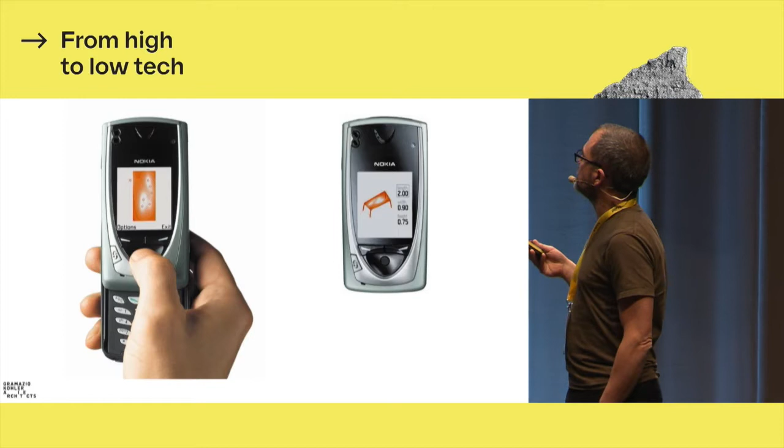Now I would like to show you a very old project. This is not research—most of the other projects will be research projects. This is a sort of a provocation we did in our office in 2002, 2003, basically building on this first smartphone. It was not called a smartphone, that was able to run apps that were not called apps. And not even Nokia knew that they could run apps—this was the tragedy of this company. But anyway, we wrote a piece of software, because this is what an app allows you: to write something and put it on another device that doesn't belong to you, that would allow a layman to design a piece of furniture.

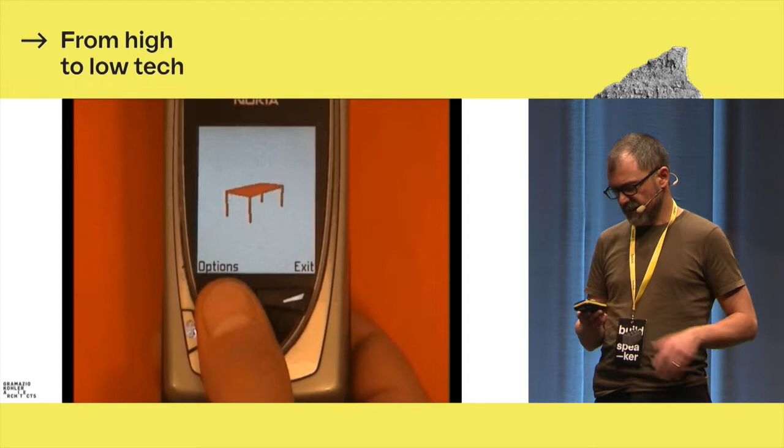I'll show you this movie—we would allow the user to manipulate a surface by placing points on it and then applying pressure, with the thumb, because it was not a touch screen, this was still a joystick. With the pressure of the thumb you'd deform the surface, and the deformation would, through a very simple geometrical operation, intersect with the other side of the plate and create a hole. By doing this, we allowed someone to create extremely complex landscapes, as being the surface of these tables, someone without any education in this context, the layman, while everything stayed compressed in very few, very simple, very minimal parameters that were even human readable.

There is clearly an authorship, there is something like a color, then it gets a bit more complex, but still, if you've seen the logic of the design, it's very straightforward. It's XY coordinates and magnitude applied to it.

With this, we are able, if we know the algorithm that created it, to generate this very complex NURB surface, and with another fully automatic step of just translating data, you can create G-code that runs this CNC router, a very simple machine that carves and mills out this very complex shape out of a very expensive piece of walnut.

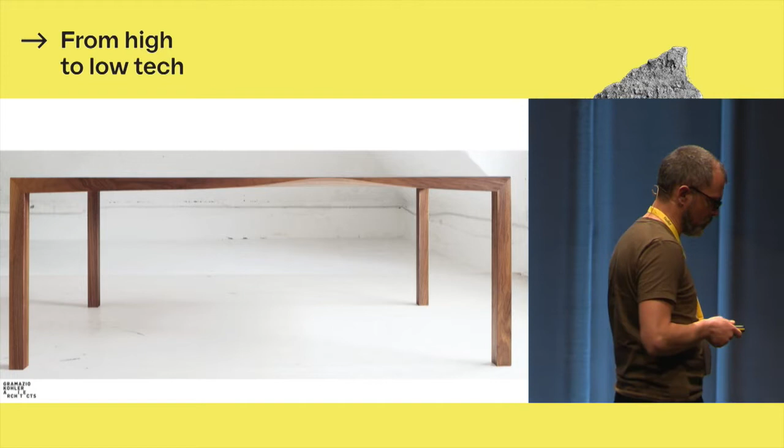And then you end up having such objects which are extremely irritating because they are elegant and at the same time they are questioning everything — the absurd table with a hole doesn't make sense, sort of, and it's even worse if somebody without any design education does it.

So basically what we were doing here was to shortcut the act of designing on a device that would not be perceived as an office machine, but just as a commodity, a phone. Until a year before, this was just a phone — you could use it to do phone calls. And here we allowed this thing to run an incredibly complex CAD software.

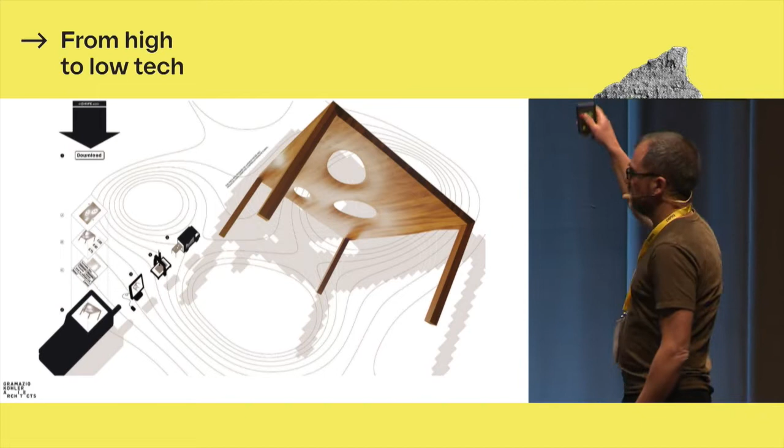And then without any human mediation, just automatically, we output on the other side a piece of incredibly high resolution material that is both beautiful and extremely problematic. And in between there is just a payment — a lot of money, because this stuff is expensive.

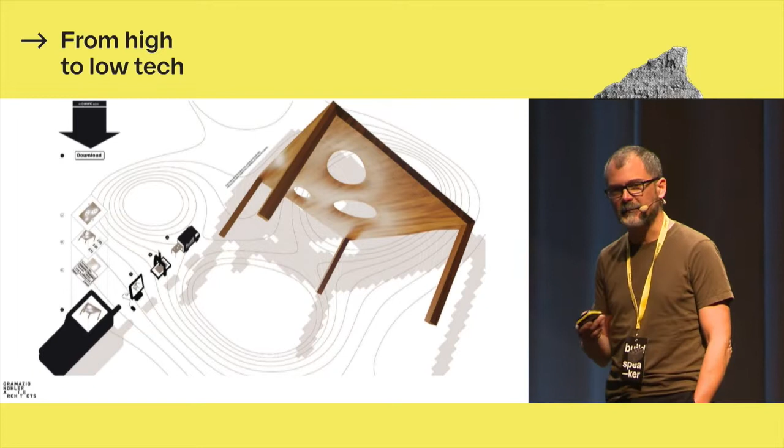We're limited to 10, you know. It was the condition in order to be able to do it, but it's like this. And we ended up with these 10 pieces bought by people who still have them and love them. But the interesting thing is the rest of them.

All these tables that were designed and never manufactured, for good reasons probably. There's just a short amount of them that I show here, and if you go through them, you see how different they are — some are more elegant than others, some would work structurally, others don't.

But most striking is how similar they are. If you close your eyes a bit, these things are almost identical.

And this questions two things. On one side, this myth of complete freedom — back then was a time of all the configurators online, from sneakers to furniture systems. And here we were radically saying, okay, you're not going to choose just the color and dimension in modules, we'll give you freedom on the form, so you can mess around with the form. So there's a critique of this fake freedom that was propagated back then.

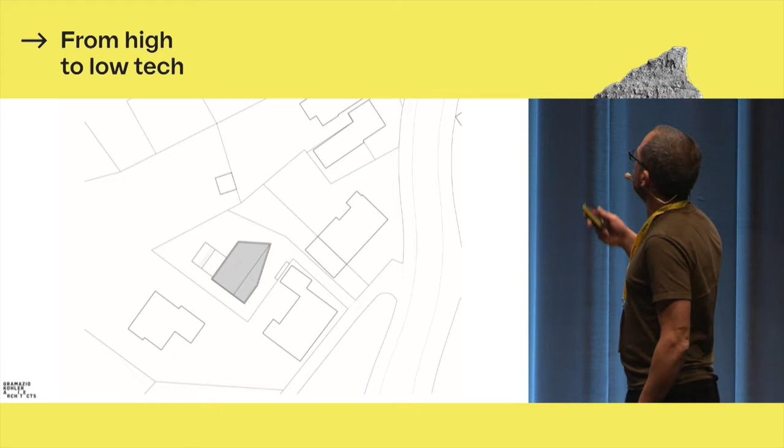It looks a bit strange, so a rectangle, it's a pretty big thing with two cuts. If I show you how they are generated, you immediately understand, just out of your own practice or thinking, how simple these things are. So it's two stories.

First one is the client builds in his own garden. Happens, and the garden is in front of the lake. So if you build a new building, you want to make sure that the old building still has a relationship to the view to the lake. And then you have an angle, and this is a number, and depending on how big the number is, the ratio between view from the old and new house plus difficulties in arranging the floor plan of the new house. So there is many implications.

The second cut is much more rational. It's just if you wanted to drive a car in the back of this house because you don't want it in the front, then you need to take away a bit of house. Here there is not much negotiation. Maybe if you have a big SUV or a small car, you could play a bit with this angle, but it's reasonable.

Okay, why I'm showing this? I'm showing this because this is a classical problem that you could very easily program. So you could write software for it, that simulates everything and does nice diagrams, many colors, whatever. Then you could show it to the client, but nobody does it, and we didn't too, just because this problem is simple enough in its consequences that you can iterate through it as architect, as human, while discussing, while sketching.

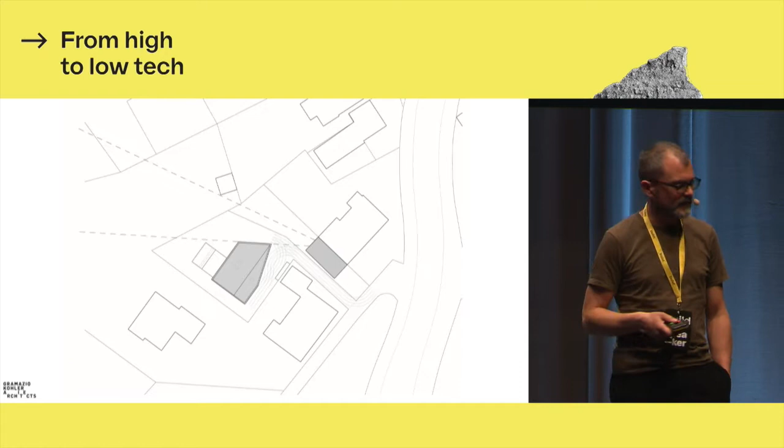And this is why you do not program. So you don't use high-tech to solve this, but it's a high-tech problem. So there is no big difference to a more complex one. I will show you the more complex problem that at first sight is also very banal.

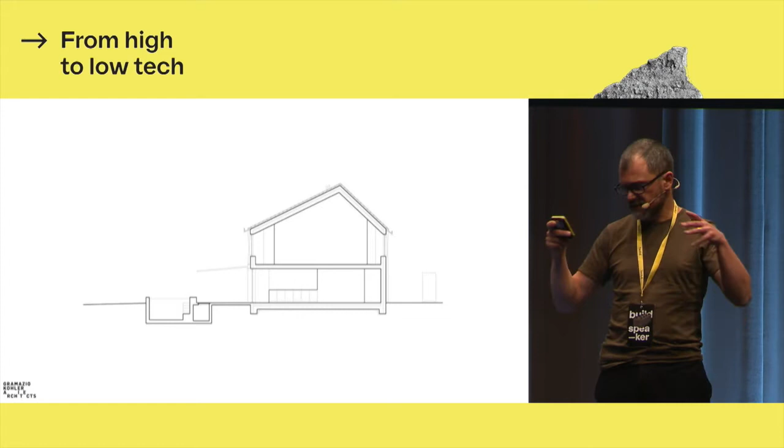Now, what you see here, these lines, this is timber slats, vertical ones, that are used to hide all this glass, because of the building code. The building code doesn't allow you any glass, and this is a trick just to pretend that this house is a timber house. It works legally. It works perfectly, because as soon as you have an angle, a minimal angle, it just closes. And if you're close to this membrane, so on the inside with the contrast and so on, it disappears.

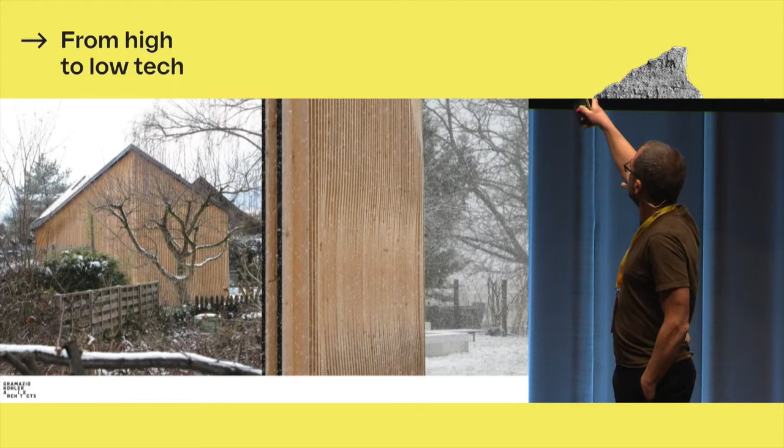And what this produces is nothing else than an engine that allows you, when designing, to create. So if you assume that you have glass, transparency, and then you put a screen in front of it, with this operation, you are able to create sort of lenses. So areas where it becomes much more transparent. You are able to direct your opening by tilting. So you could have a preferred side.

And this is the thing that allows you to do what architecture has always been about. Transparency, directing the field of view, closing up because of privacy or because of overheating or whatever. So it's sort of a modulated surface.

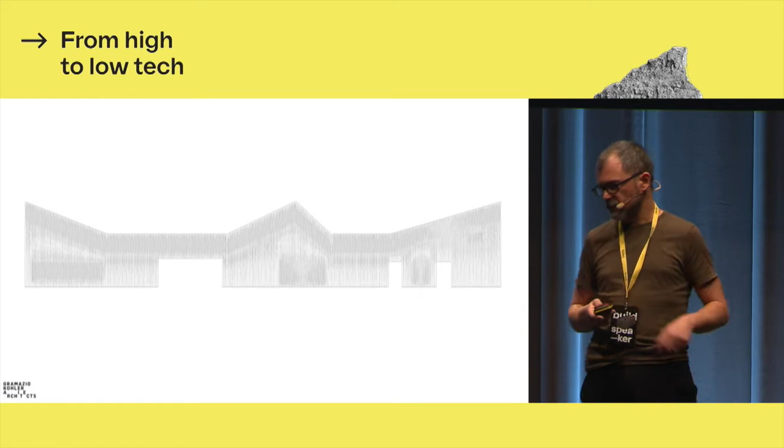But if you consider designing, by designing I mean modeling geometrically, I can do this on paper or on a computer, doesn't matter so much, 315 parts that relate to each other, you'll find that architecture is about iteration. So you do something in order to test it. You draw it or you build it in order to find out if it's good and where you should eventually move. Then it is not going to work. But if you parameterize it, and this is programming, if you say this simple logic is formalized in a piece of code, that allows you to instrumentalize a computer that can go through these 315 parts—for a computer, even a smartphone nowadays, this is nothing—then you are able to control this whole thing.

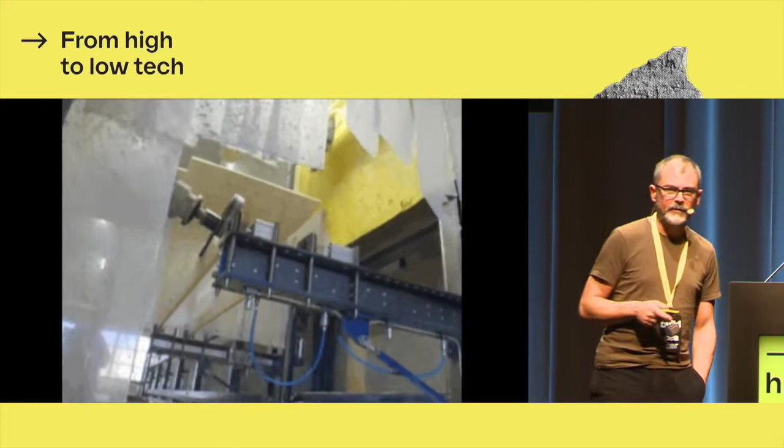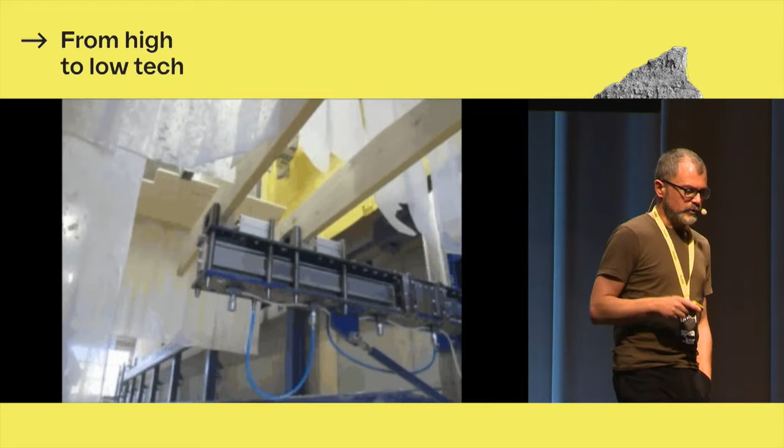So the same thing that before was a simple iteration between one number and a consequence is also feasible here. And then the second thing: once you've done this step using high tech, so you don't draw it, you program it, then you have automatically produced data. And if you have produced data, in analogy to the mill and the table I've shown you before, you can use a machine like this one to produce these 300 very different, very specific parts automatically.

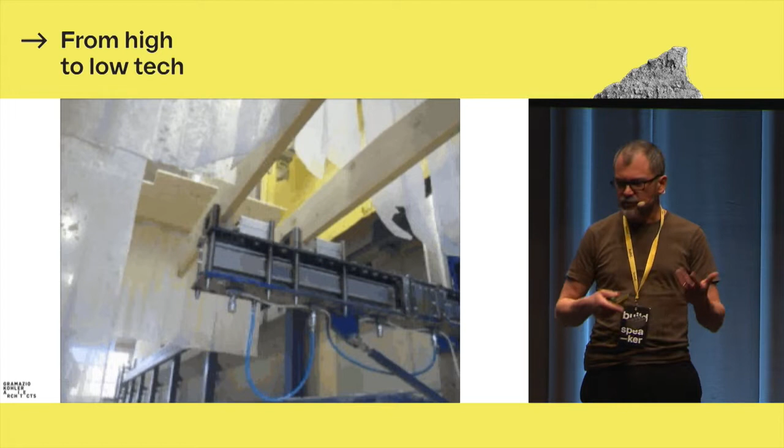This is very important, because if you had 315 drawings and went to a contractor, you'd get a high price, probably, because it's not what they do every day. The logistics behind it are a bit messy. But this machine is one the contractor would use anyway for the 315 parts, even if you don't ask for it. As soon as you say, I want them flat, flush, and 22.5 centimeters, and he has 25, he puts each part on this machine, runs it through, tilts it, turns it 180 degrees, and runs it back. So by doing this, we didn't add one euro to the project. We were just adding data.

Okay, and this is the result: sort of a minimal intervention on these physical parts that often is not even visible. Sometimes it becomes dramatic in its consequences, depending on where you are.

And this is an important part. It comes for free, but it doesn't come for free just by chance. It comes for free if you are designing the whole process. And then many questions become relevant: did you first find the machine and then derive the design from the operation the machine is good at? Or did you start with the design and then were very lucky because this machine matches? These are tricky things.

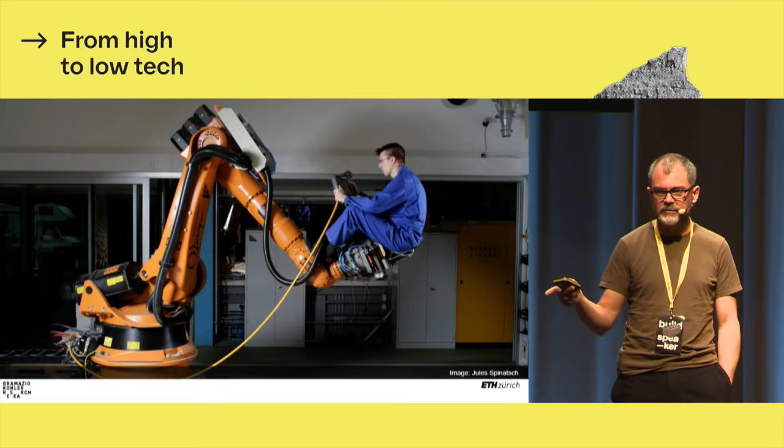Because this is high tech, although it's not so much high tech. We started with this in 2005, and this machine was already a commodity, a cheap mass product compared to the two machines you've seen before, which are more expensive than this robot, because this one has been produced in millions of pieces. This, by the way, is an artist's image.

It's not the way you actually use a robot, but we use it because it nicely shows that, at least for us, this machine always engages a dialogue with us at different levels - as craftsman, as designer, as client. But the machine is not autonomous - that doesn't make sense. So there is this mutual dependency. This is also a nice and important thing.

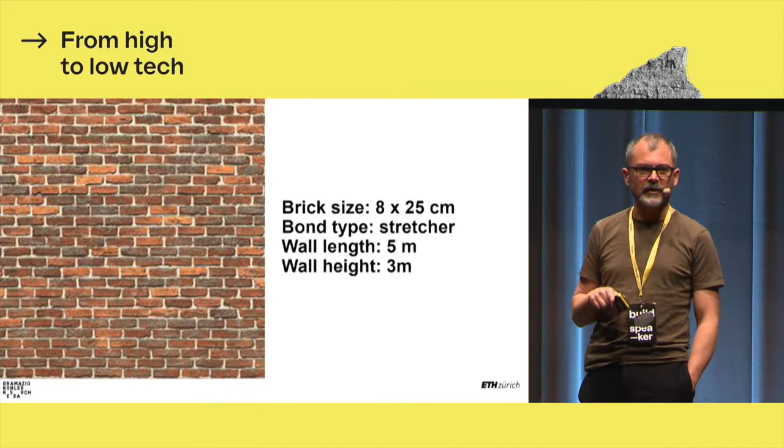Now if we work with a computer and a robot, with technology, it doesn't make sense to explain to a robot what a stretcher bond is. That would be a strange detour. But we write it like this because this is the way you describe it. I'm using this example because it's so banal, so simple. There's nothing simpler than this. Two loops nested one into each other just produces this wall.

If you do more complex three-dimensional things, it gets way more complex. But in order to talk about it, this is a good example. So this produces exactly this, and it's uninteresting so far, because it doesn't produce anything new.

Now, where we got excited—this was a few months after getting this robot—we said, okay, let's start with bricks. We don't have time to reinvent processes now. Let's just check what we could do with this machine that's able to automatically place parts in space, with the oldest standardized part of architecture. Here you see a student checking what else could happen in such a bond. He tries to rotate these parts, to understand the tolerances, how much he can turn them, rotate them, until they fall down, cantilevering and so on.

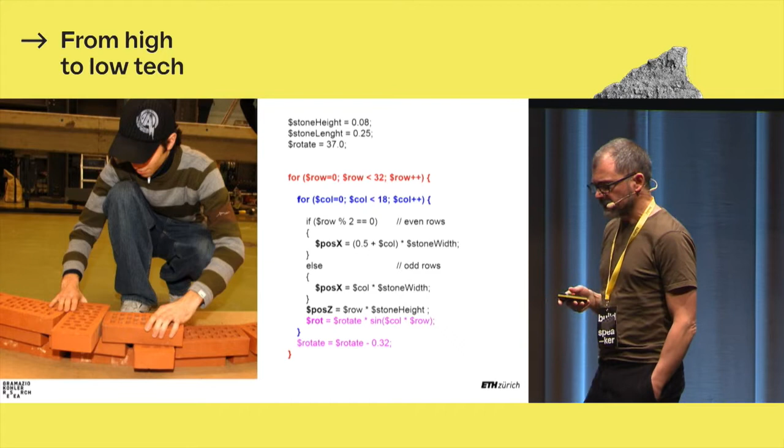Then he decides to add these two lines of code at the very end. So only the pink has changed here—this is exactly the same. From the variable names you understand it's about rotations. It's not important to understand exactly what he does. The only important thing is that now he modifies the position of each single brick, so there's no rule anymore from this point on.

So the code is here—this I can read, I can change. This is operational, and this is just data. It's a mess, you know—but now this is a mess for us humans, because this I cannot give anybody. I cannot draw it, I cannot give a list.

This beauty of the stretcher bond as a cultural convention allows us to make sure we get what we want. Here it fails, but it doesn't fail with a machine—on the contrary, the machine expects this, and would have huge problems with any other notation. This allows us to directly connect the power of design—the conceptual level, the operational level that includes high tech when you program. This is a new part of our profession, a new skill, directly with a physical output taken care of by a machine that doesn't care if this wall is regular or not.

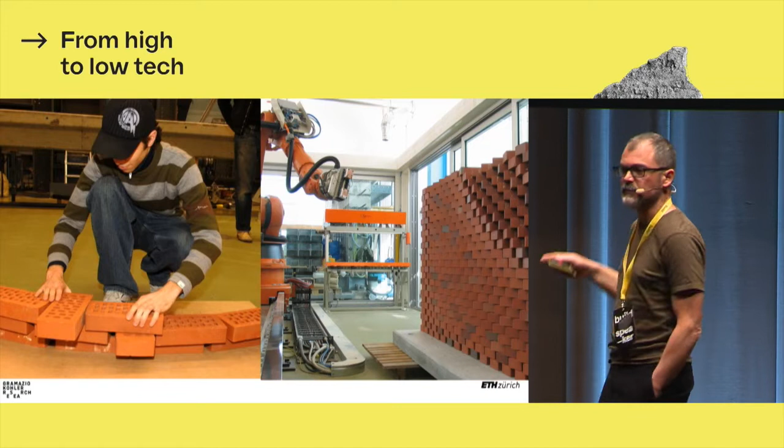We're again at the previous example. It comes at exactly the same cost—as soon as this process is set up, there's no cost difference. This is fascinating, because suddenly you end up with something like this, and this is where, for us, this term of digital materiality started to make sense. I think that is extremely physical.

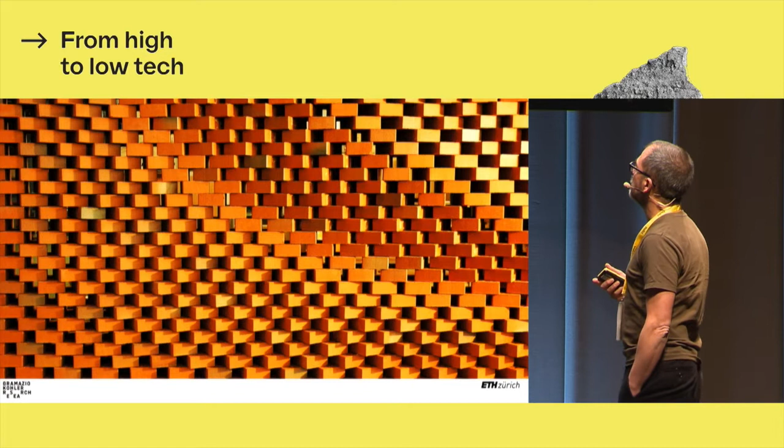It's also scaleless to a certain extent. It's about material, but also about relationships of volume, voids, light, and it's completely malleable at the same time. It's not a result of something super expensive, super complex, super luxury—it's the simple thing you can get if you engage with such thinking and such a design process.

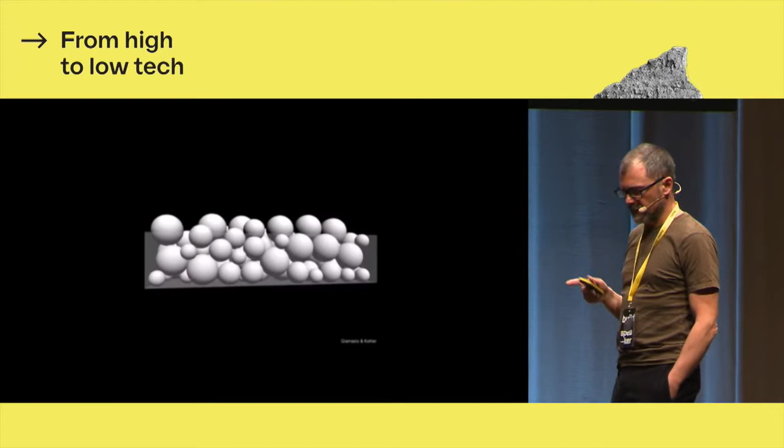Now I'd like to go through two real-world applications. This is a winery—I'll show it because we have another winery I'll show later, and I like to show the relationship between those two things. This is the way we designed it.

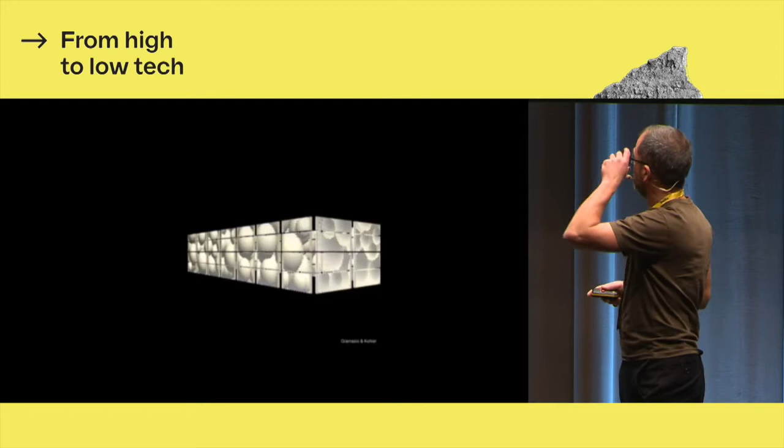I can't explain it in detail now, but if you have the freedom to freely place 10, 20, 30, 50, 100,000 single parts, the question of how you turn them becomes pretty relevant. So you need a strategy to inform it, to produce the data. This was pretty banal, straightforward. We filled the building—which, by the way, was given to us, an objet trouvé, not designed by us—with spheres, did the dense packing, looked at it, transferred the color information to the rotation, and ended up with this. Then we implemented the process. Pretty easy, you just need a gripper.

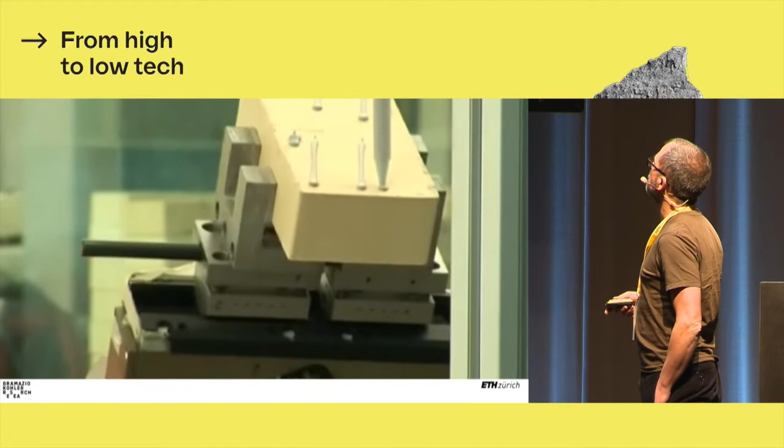And everything else is pure information. So knowing how the glue has to be applied, and then the final positioning is super simple for the robot. It's all automatically derived from this terrible large amount of rotation and numbers that give us a headache, but not the machine.

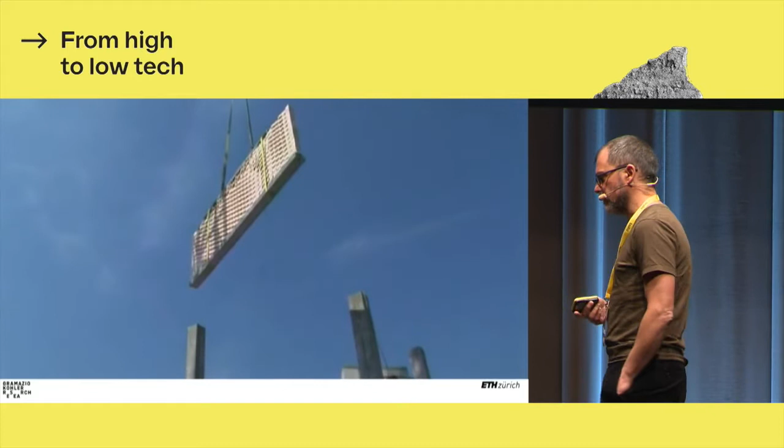And then we started to think about this relationship between the size of the parts and, in our case, the robot. Here you see a few images. You see what it does then to architecture.

Always keep in mind that there is no difference to any other pattern, or even if you would do it completely flat, regular, a pure stretcher, you would use the same amount of bricks, the same amount of time, the same amount of energy, and so on and so forth.

The second one is a bit more complex, also because it scales up the number of parts, and here the number of parts become custom, although in a very controlled manner. This is 50,000 parts, timber parts, slats, 5 by 10 centimeters, so a pretty fragile thing, aggregated to one 2,300 square meter roof, structural roof.

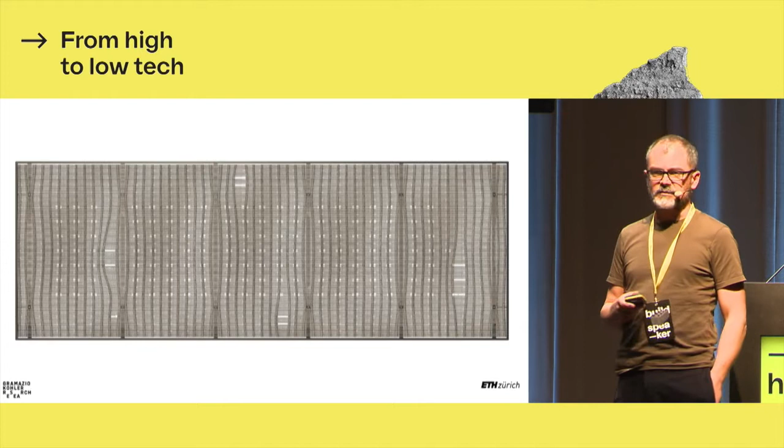And it's not only 50,000 parts, it's also almost 1 million nails. So it's a pretty brutal, simple way to aggregate this thing.

And what you see here, why this drawing is interesting and important, and by the way, it's probably the only drawing that exists from this project, because drawings were useless. There was only data. But what it expressed very nicely is that these parts, the simple part, at this resolution, may turn the whole thing into almost a fabric, becomes textile.

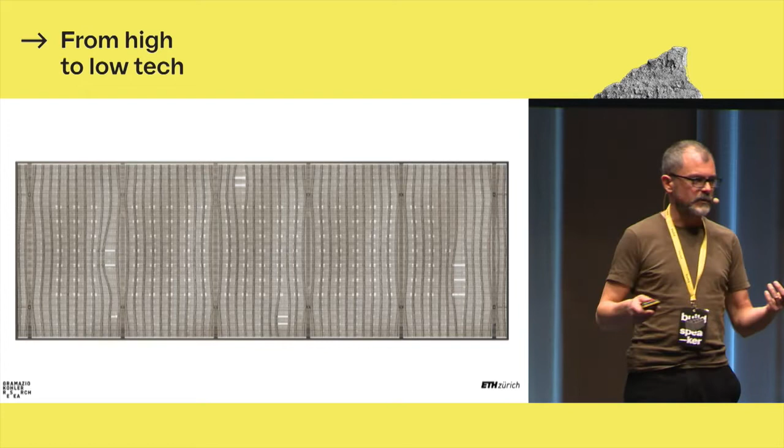As long as there is a computational relationship between these parts, then you can, for example, there we had, it's always the same thing. At the very end, you find out that you need ducts, you know. You had them in the project for the staircase for smoke evacuation. You had them in the project, but they were always too small. Then at a certain point, the engineers say, oh, this needs to be 3 times bigger, and then it doesn't fit anymore. And then normally you would just cut out, you know, and do some fixes.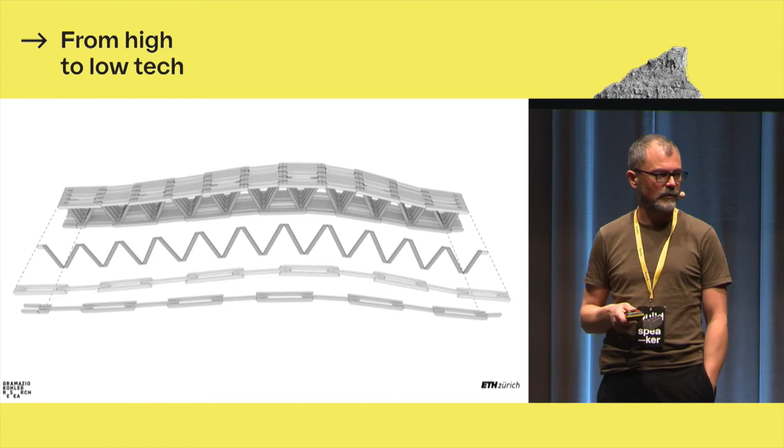And here we just stretch, because as long as it's not built, it's completely malleable. We just stretch the thing. Because the system behind is extremely straightforward. It's just this big, long 15-meter trusses, and the only thing that changes is the relative length and the angle on the end cuts of all these subcomponents.

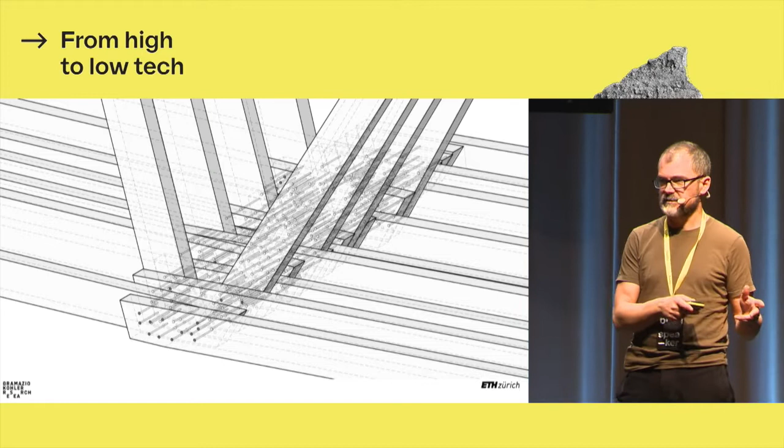And then we zoom in another step, then we have 1 million nails. Again, they all have their own position because there are so many dependencies. So I think you can forget about designing and standardizing. There is not one that fits it all here. But it doesn't matter, because as long as it's computationally described, then you don't care.

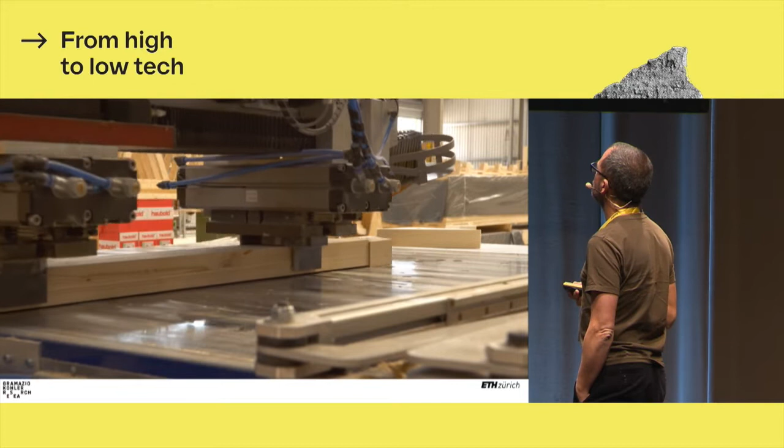Here you see again how simple then the fabrication of such a thing is in reality. This is the brick we had before, and now we just cut its ends, so we can have a bit longer and a bit shorter bricks.

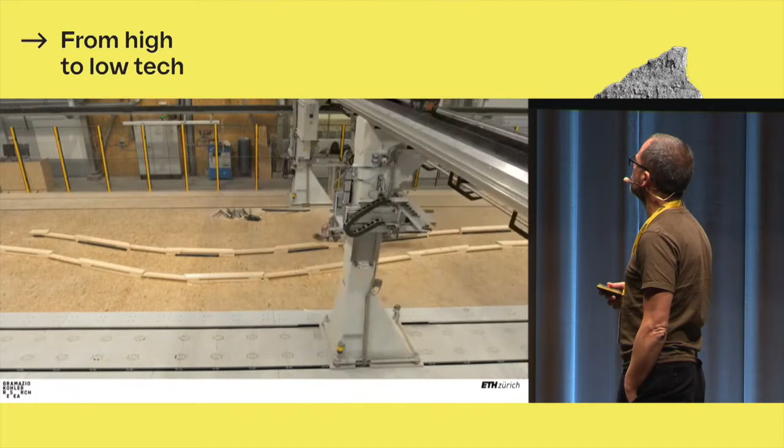This goes onto the table. This is now a very large table, and this huge robot places the parts, and after a single part has been placed, a first nail is shot in order to keep it in place. Then it turns the aggregate, the end effector, and brings the rest.

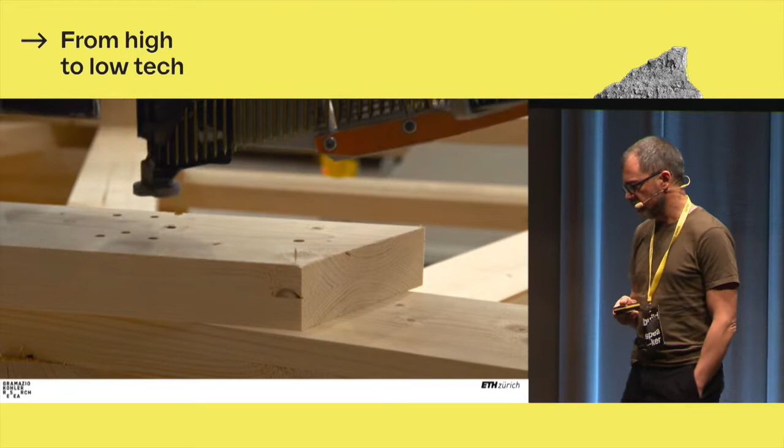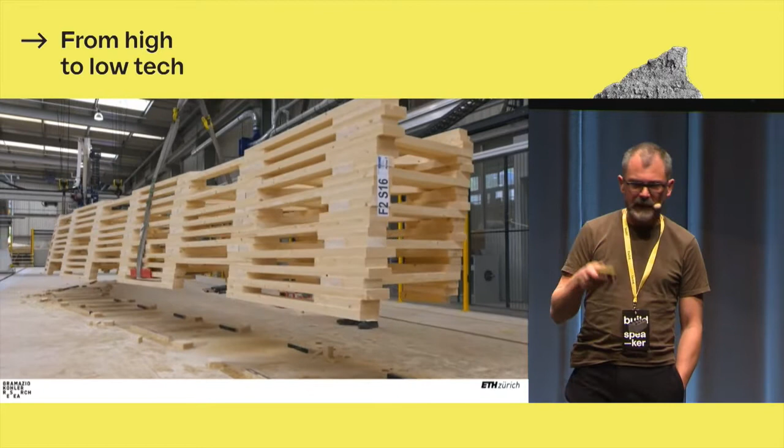And these huge parts, custom parts, are then installed, so completed with all the subsystems: sprinkler, electricity, light, and so on and so forth. This is the classical processes of prefabrication, all done in the shop, and then they are trucked

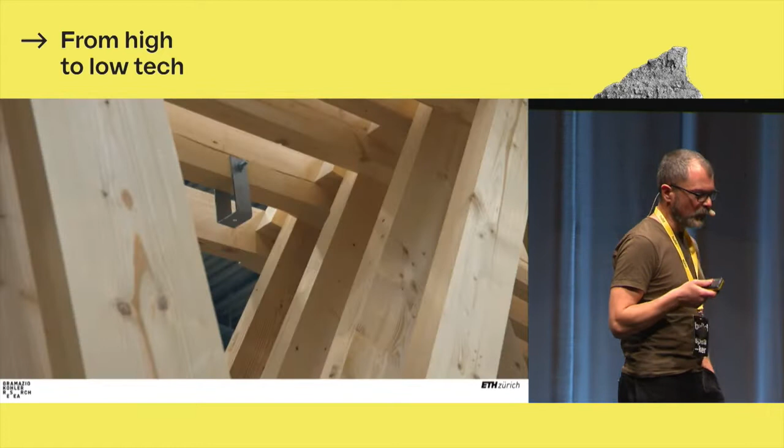onto the building site and installed there. And what is impressive and important is that you start from 50,000 parts, and without any human intervention, you boil them down to 168 parts. This is one part. There are 168 of them, and they just get picked up, craned into position, and fixed with 5 screws. And this is not exaggerated, because they have just their place, they fit.

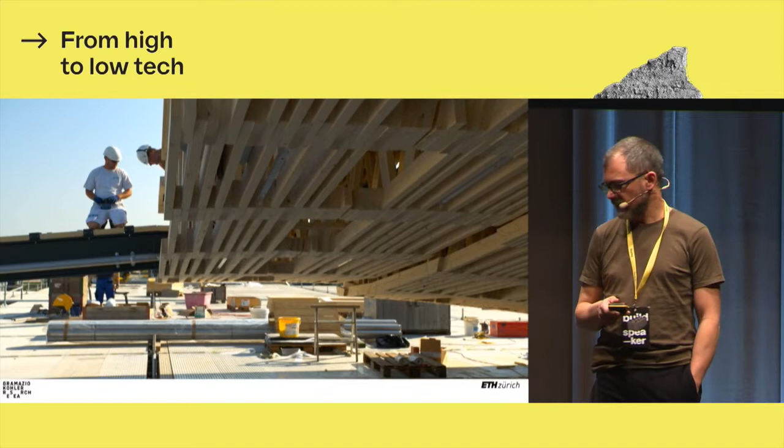This is nice because it's our institute building. We were actually allowed to integrate research in a project the university would have built anyway, which is a very good thing. Now I wanted to take a step forward and introduce 2 projects that are pretty recent

that work with augmented reality. And we started with one timber project, where again we have parts, and these parts are all identical. The project is about a wall, an acoustically diffusive wall. I won't explain how this works, it's complicated, not the point here. But the building system is what you actually see here.

So you have parts, and these parts need to find their position. Now, this is exactly what 10 years ago we used a robot for, because it's just about, this is always the same element rotated. You have 4 possible positions, and then you have a Z translation. This is exactly the data that back then only the robot was able to manage, but with augmented reality, we

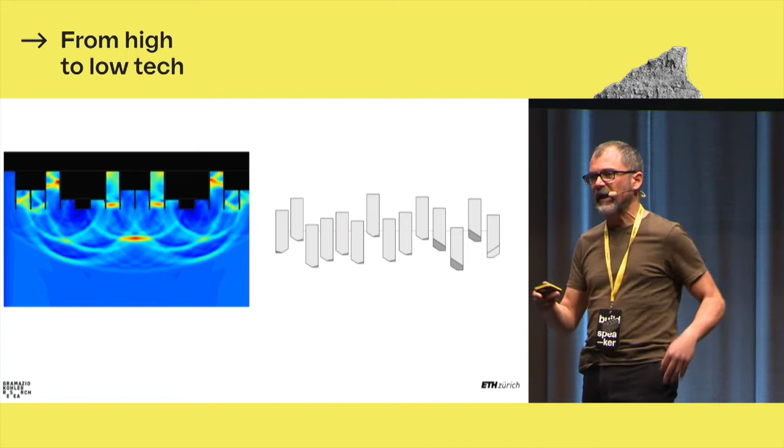can make this thing extremely more flexible, because now just these very simple relative operations of parts, prefabricated in large amounts, can be very quickly and very easily placed at their final position in space relative to each other. So here we can transition from this just abstract bunch of data to this very precise and organized wall with these simple tools.

They are basically, we'll see it in the next project, basically a camera and a display that tells the person where he is in space. A few images of this thing.

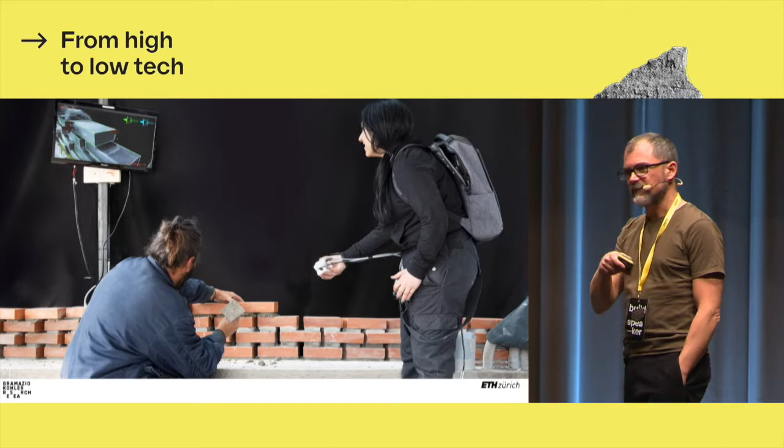And now this is a second winery, and this is a very funny story because we were approached 3 years ago, before the pandemic, by people that were also producing wine, and they were also like the first one, Gantenbein. There were so many similarities. These were people that came from another profession, decided to invest in a winery, God knows why, and so on. And they knew that we did the last one, and so they asked us, could you do the same thing for us in Greece?

And we pretty instinctively said, no, we will not, because there is no point in doing it. We have done it, and it was after the financial crisis. It felt really odd to bring robotically fabricated brick elements down to Greece in order to install them there. Why? But they came back to us a few times and obliged us to think, okay, what is the problem? What is the difference? And then we decided, okay, we do it, we redo the project, but we radically change

the premises. So we do it with local labor, with local material, with augmented reality. And here you see how this worked. And it is very nice because, while the first winery was reduced to the max because we weren't able to use mortar, we had to use glue, and this was a bit of an ugly thing.

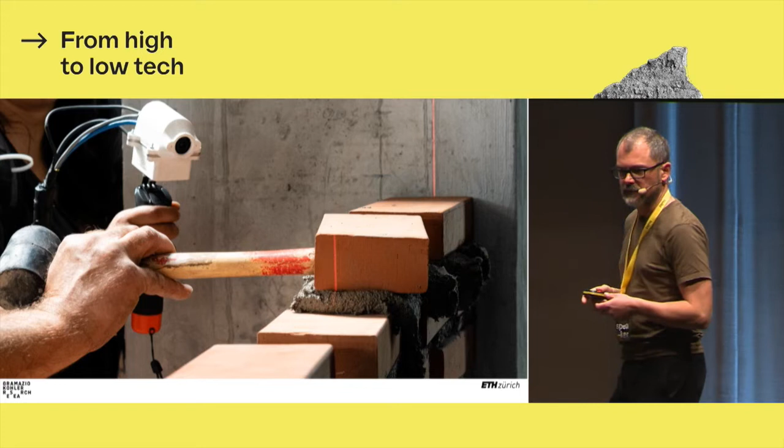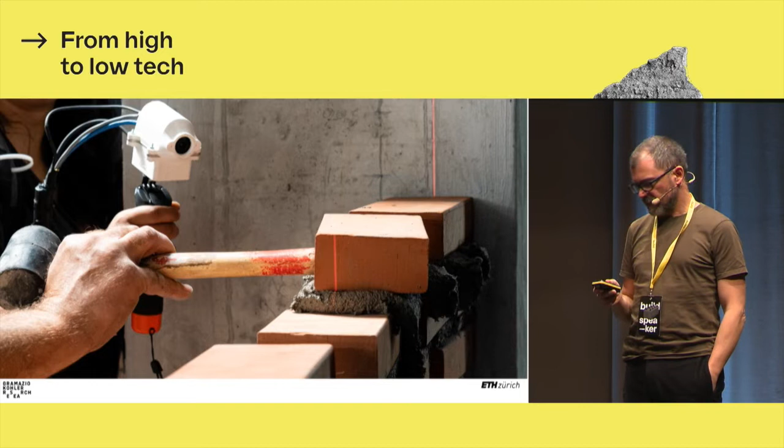Here, thanks to the dexterity and the craft of these people, that do everything, they do it extremely fast, extremely efficiently. They even have fun doing it. The only thing they don't know is where the part goes. And here with this system, we allowed them -- because the first placement is pretty intuitive, but then in order to understand how to move it on the last 5 millimeters, this system becomes essential. I'll show us a short movie.

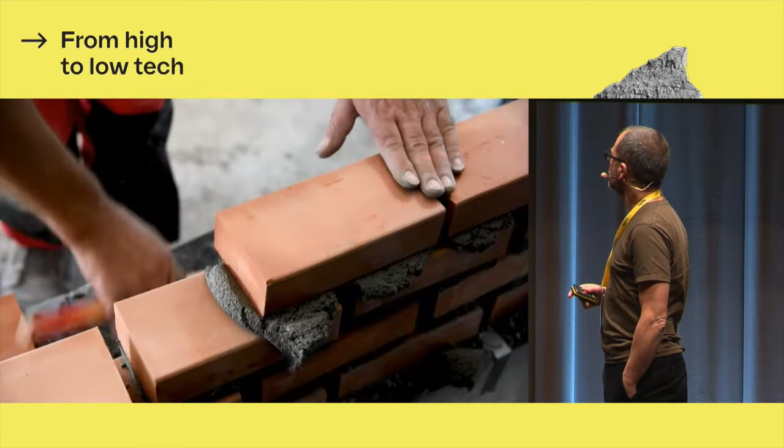Some active process. And the nice thing is also that this was an objet trouvé -- this was not planned by us. This was a ruin of the financial crisis. So basically they started to do something with an engineer, then they ran out of money. The whole thing stayed like this for a certain number of years, and then they restarted. So it was about intervening with

custom brick elements in an existing frame. And here you see how many super complex operations are involved in the production of such a thing. And I can tell you, we've worked on the automation of processes with robots for 15 years. This is crazy complex, what is done here.

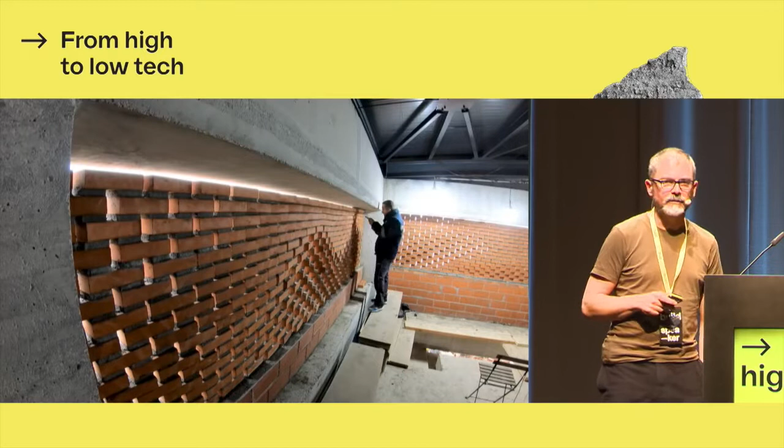Now, this has many implications, because it could look like this would fundamentally question everything we have done before. This would be one way to read it. Or it could mean that, because this is not just going back to something, this is going radically forward—when we started this, the possibility to track something in space at this precision was not even thinkable, not even with a lot of money. Now this thing becomes accessible.

For us, what it means is that by going even more high-tech, we are able to integrate many more things than before. Before it was a pretty dry, closed, locked system. And at every edge you were running into a problem that would cost another 200,000 to automate, even if not so interesting, but necessary—because without this investment, the whole thing would just collapse. If you're able to fluently integrate everything—information, craft, robots that understand that you're around so they ideally don't kill you—this suddenly becomes 3,000 times more powerful. And these visions we had 15 years ago, where with time, by understanding how complex these things really are, we started to get concerned about how many hundred years this would take to become reality, have now suddenly become much closer. Now suddenly these things are thinkable.

Now I would like to go into materials—material processes and self-formation—because these two things relate to each other at a certain level. But in order to explain what I mean, I'll show just two projects. This now is really, we call it research, but it's probably more than research.

We always start with an installation. We always start with something that we haven't understood yet. We just try to do it brute force, see where the limits are, by putting in a lot of work and risk and so on. And then in a second round, we go after it in a more systematic way.

This is a project that builds on the physical phenomena of jamming. It's described what happens to rigid bodies if they are constrained by limits or by forces, and if under certain conditions they jam—meaning the single parts are locked, they're not able to go anywhere anymore—so the whole thing becomes rigid.

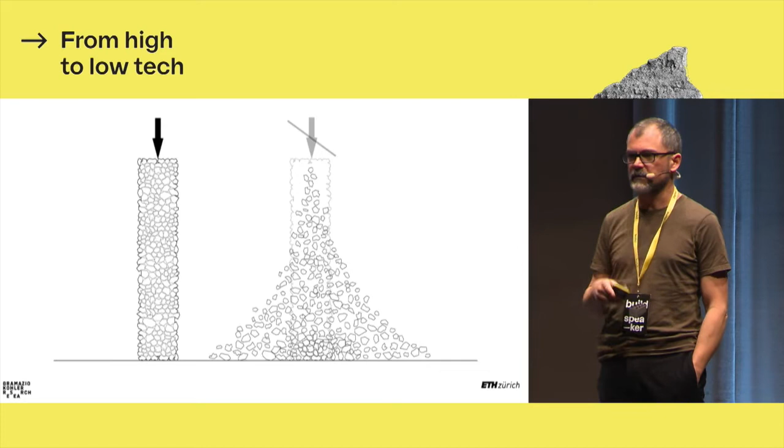The nice thing, the very specific, wonderful thing that distinguishes this from many other ways you could produce rigid parts—by introducing glues or mortars or whatever—is that the jamming transition can be completely reversed without any degradation. This can go back and forth an infinite number of times. It's not limited, but it's very much related to form.

To understand this, this is what we have done: you can have a tube and then fill it with whatever you have at hand, and find out that with spheres it doesn't work at all, and cornflakes are perfect—they have the right form for it. Okay, and with this we did an installation.

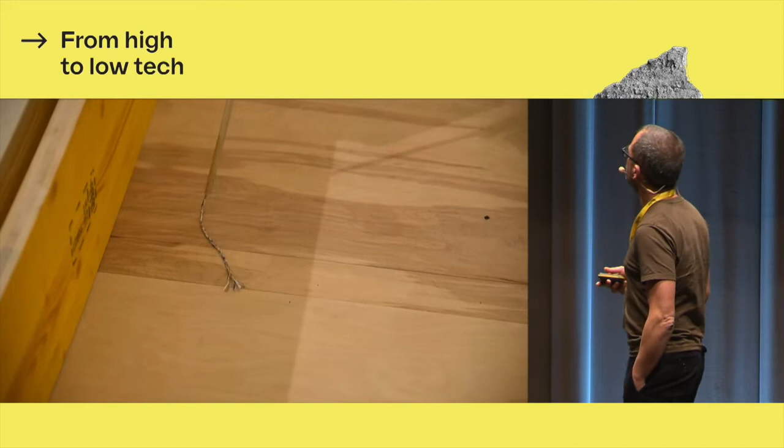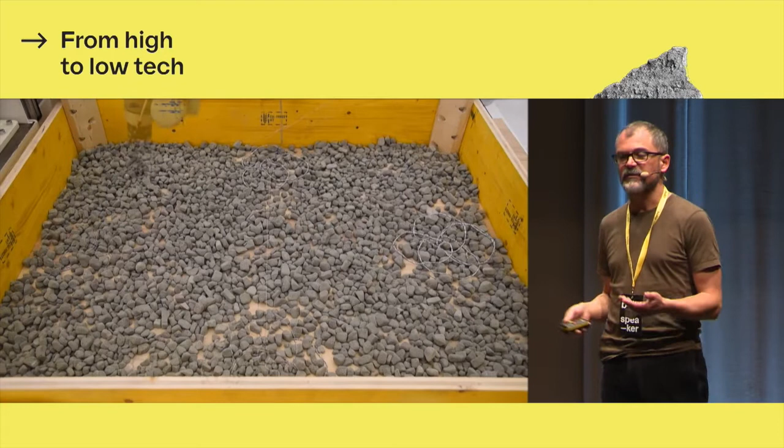We were asked to do a piece for the Chicago Biennale. And we decided to provoke the jamming effect by introducing just very common recycled string in layers. This now looks very simple, but we went through hundreds of tests with different configurations, materials, and so on.

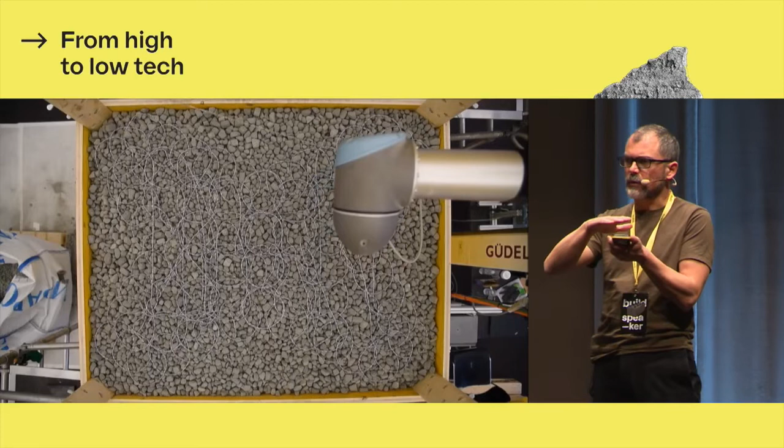At a certain point, we found out that if we do layers and then have this string, the string doesn't even need to be strong, because it's not really a reinforcement—it's just making sure that these rigid parts cannot leave the surface, and there is no chain reaction. So there is friction, but a minimal one. And as long as the whole thing stays together, it can really carry interesting loads.

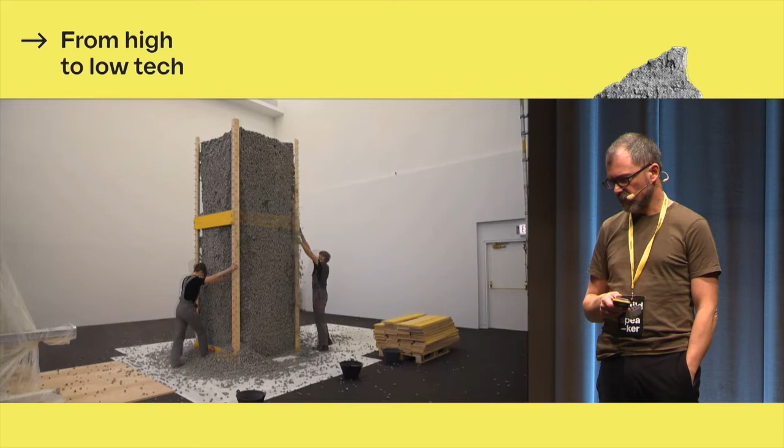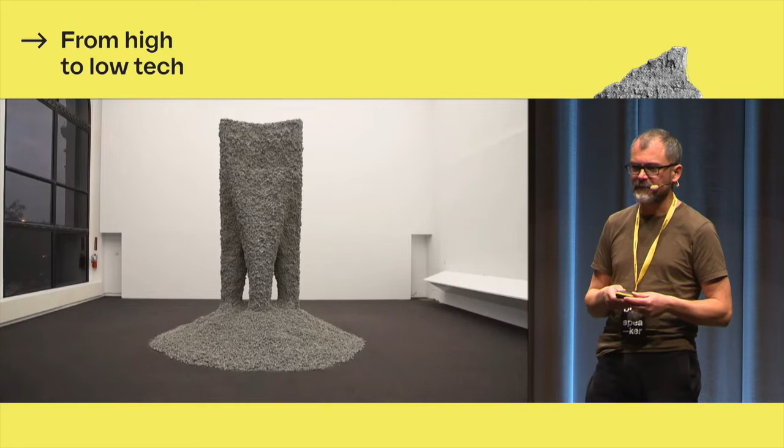See, this was filled, and now it gets demolded, and material starts to collapse because this physical limit is not there anymore. And then you have to create this chain reaction. So you brush it a bit, and the brushing works until you've reached the string. The string is the interface between what is sort of solid and what is just loose.

And this was then the piece we showed. So the direct manifestation of this project: you introduce a form with a robot through a string in a formwork, then you demold it, and then you leave just the material where it was. And it's a very interesting materiality because it's extremely strong, extremely robust, resilient. It can reassess.

If you move this thing, you'll find a new equilibrium. At the same time, it's extremely fragile. For example, by beating it, you cannot really harm it. But by brushing it, you can slowly destroy it, because you get these pieces out. And then it has this fantastic property of being fully reversible.

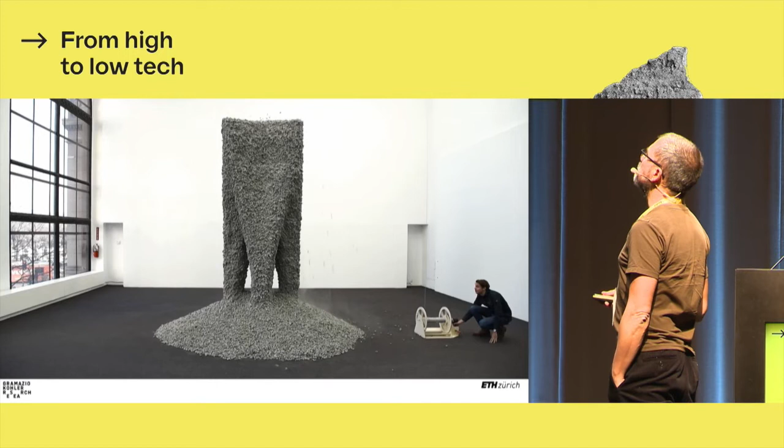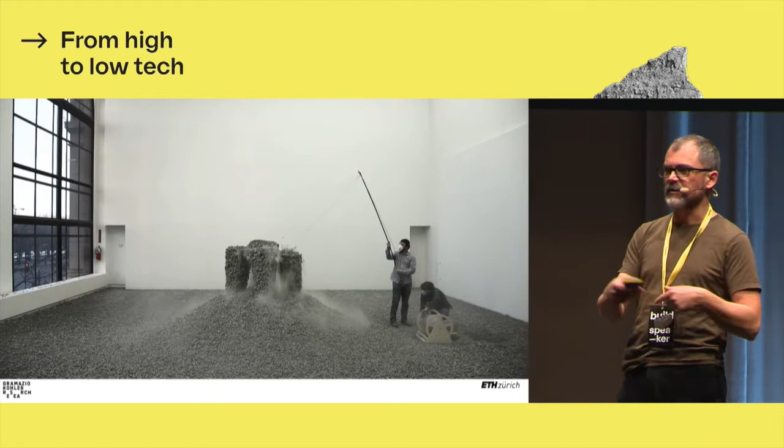And this is probably now what architecture has to become: an aggregation of parts that can be rearranged an infinite amount of times. This is, of course, a beautiful, poetic way to disassemble, because it's like rewinding the movie of the construction. But it's not, it's just rewinding or winding up the string.

But beyond this nice poetic implication, the real message is: how do we manage to do this in architecture? So to get rid of all these thousands of kilometers of ugly tape that are needed everywhere. And this project doesn't have an answer to it, but it's asking the question.

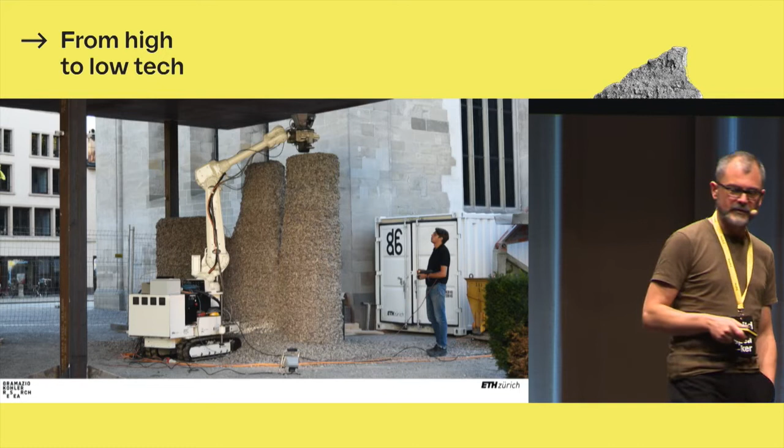And then, of course, second step was with a PhD student to really go after it and find ways to automate this and measure its performance, and ended up with a very nice pavilion that was also loaded with a really heavy steel plate, a recycled one, 9 tons, in order to give it the weight needed for the whole thing to be stable. Yeah, okay, this was the jamming project.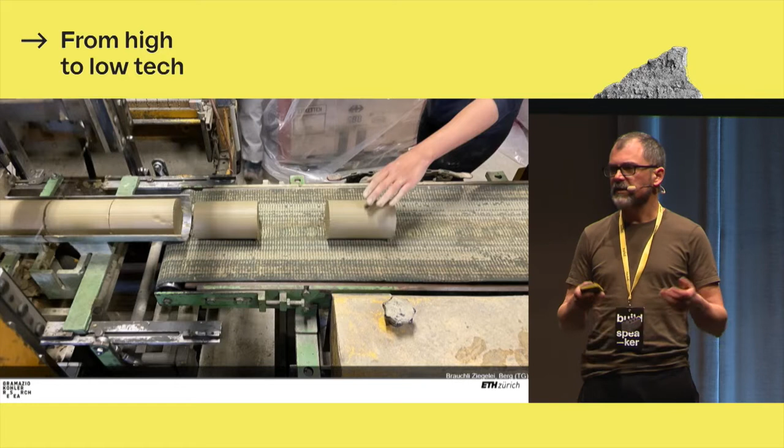And at the end, the last topic is I go back to bricks, but I change material. This now is clay, it's not burned anymore. And what interests us is this material - here you see it, this is the raw material. And this is once it's processed and extruded, these parts, in this case the cylinders that we use for these projects - for a pretty long time they can be deformed, because you don't burn them.

Then, depending on where and when you process them, you can do incredible things that you cannot do with real bricks, because if you do these things that I show you in a second with real bricks, then you just create trash. The project is about this.

It's sort of a counter-thesis to the 3D printer, even the 3D printer we have seen today, WASP. The printer is bigger than the building, and this at a certain point creates a problem - a logistical problem, a physical problem, a structural problem.

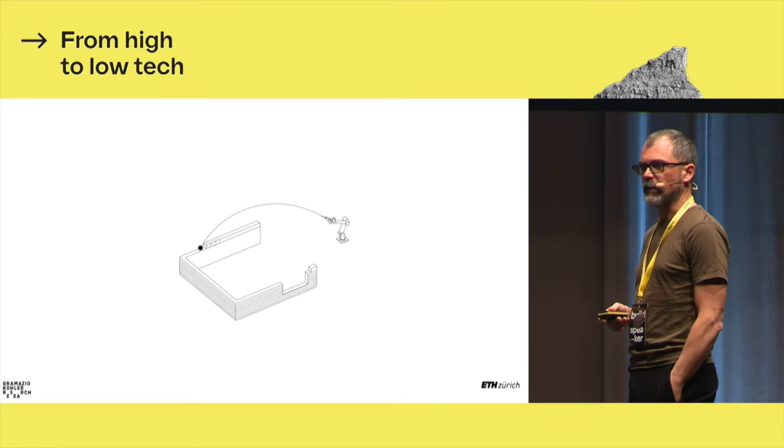We said, what if we could shoot these parts through space to the right position? And there, of course, there is a great deal of naiveness in such an assumption, because there are a thousand reasons why this doesn't work. But then our technique in such cases is to really try to find solutions.

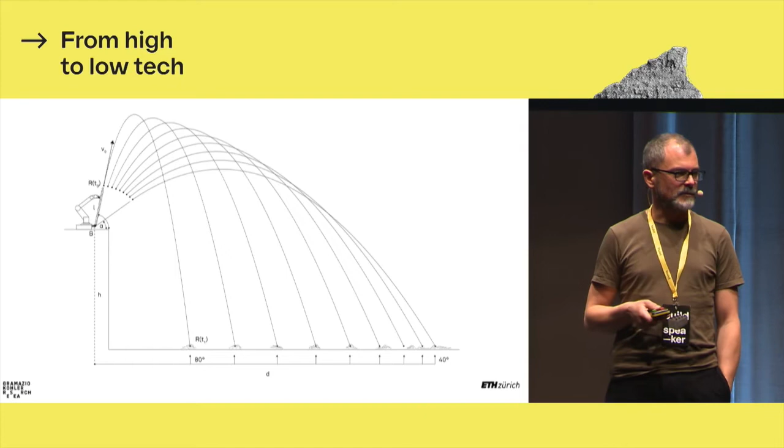First thing you find is that the problem is not that new - the ballistic curve, everybody knows it. At the same time, everybody knows that this doesn't really work. This is a nice simplification, but in reality you have so many disturbing things, like the fact that these parts are not all the same weight, and there is wind and whatever, that you need something like this.

So you need a feedback system, you need a device - in our case a scanner - but in military technology this is known for hundreds of years. So if you want to shoot something somewhere, you need somebody observing it and then giving feedback: it was too long, too short. This is exactly the same, it's just a closed loop.

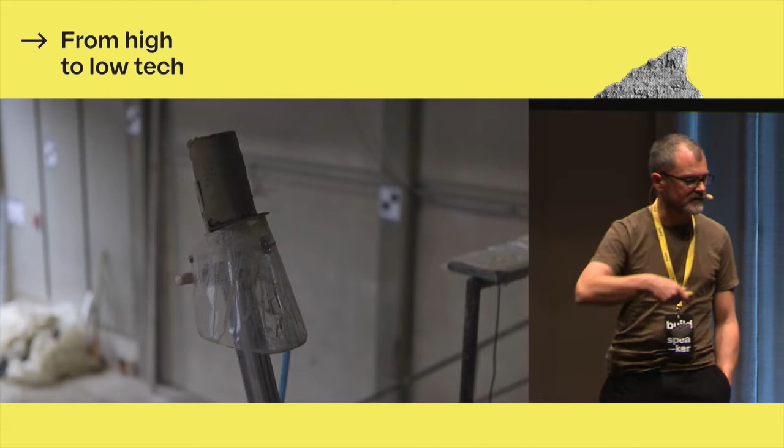Without humans involved - where when a part lands, this is the scanner, the whole system gets feedback if the calibration of the system was good or not. And if the system observes failure, the system starts to adjust this parameter - for example, the angle of shooting or the force, the kinetic force that was given to the part.

So this machine is extremely simple - it's just a piston that is oriented by a robot. It allows shooting these parts through the air that at the beginning are platonic bodies, cylinders, but when they impact, they do two things. First, they close the gaps.

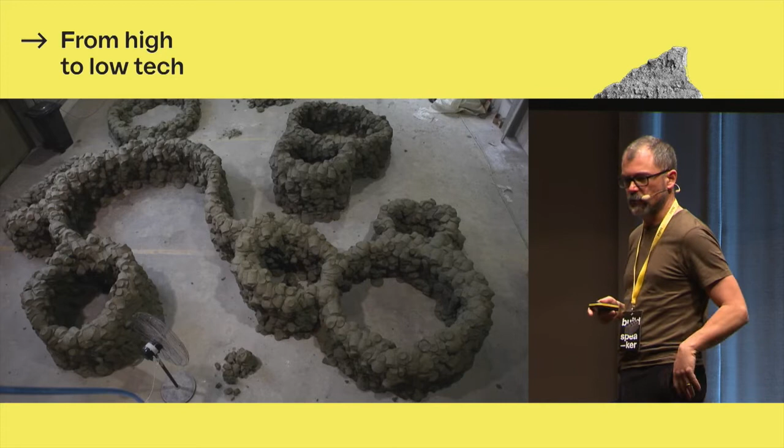And the third thing that is fundamental for us is to create a completely new aesthetic, where it's not so much about control or precise pattern, but much more about the dynamics. It's about still being able to read in this homogeneous material, which is actually vertical—it's a wall—for example, where did the part come from?

Because the deformation of the part tells this story. This is a nice thing, just to close, to show how out of control this thing is.

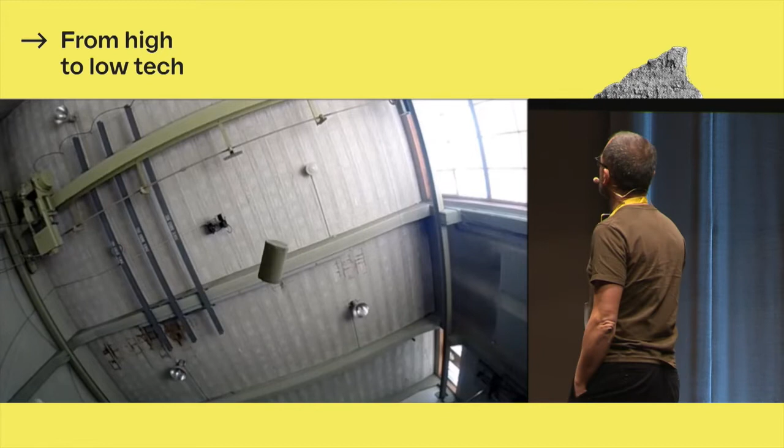So now, if you would go after this just with technology, trying to find a way to control it, you would fail—it's impossible. So this system tells you that you have to liberate yourself and let this thing just be what it is, and concentrate on the most important thing: that it grows vertically, that you can control its geometry.

This is the last project that builds on the first one. The first was an art performance—there was no scientific proposal or PhD, whatever. It was just fun, but it helped us build the case for this second project, where we have three PhDs, one with us and two others in material science and robotics, where we want to do the same thing but in a more controlled way.

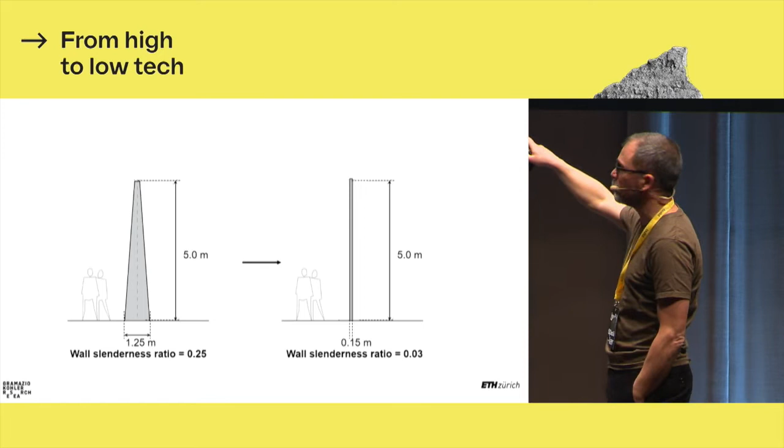And what you see here is just the brief. So we needed to go up five meters. The engineer said, if you want to do this with this material, given all the unknowns we have, then we need 1.25 meters at the base. And then you think it through and you find out it will never work.

It takes us half a year to build this—it's way too much material. Then we said, okay, we'll go up with 15 centimeters. Then you have to find a strategy. And that's where you need the control, because you know how the shape should be if you wanted to do it with 15 centimeters.

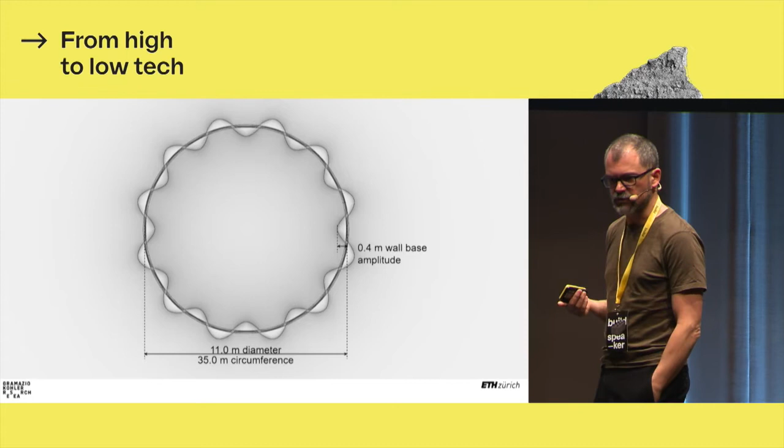This is no rocket science, it's no magic—it's just simple things that you can test with paper. But to do a thing like this becomes, of course, very demanding.

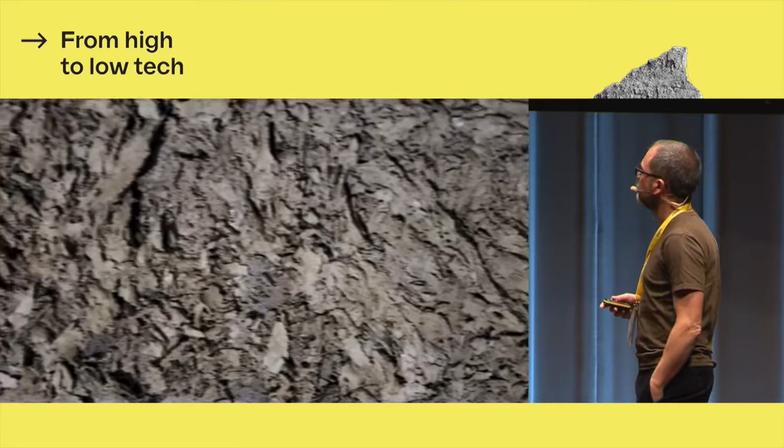And with this last video, this is the simplified version of it, where you now have a robot that doesn't throw it through the air, but presses these malleable bricks one into the other.

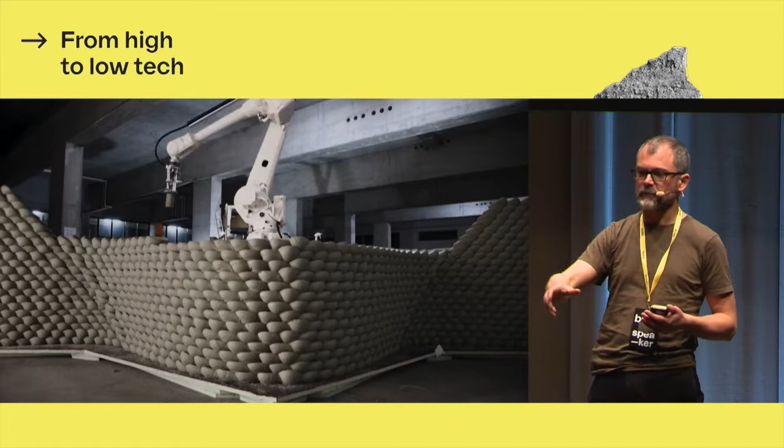And again, here it's both—it's the dream of automation, because if we could do this at large scale and, most important, at high frequency—because there's no reason why this has to be so boring and slow—this could be 10 per second, 20 per second, but still under full control of the mechanical properties, departing from one standardized part.

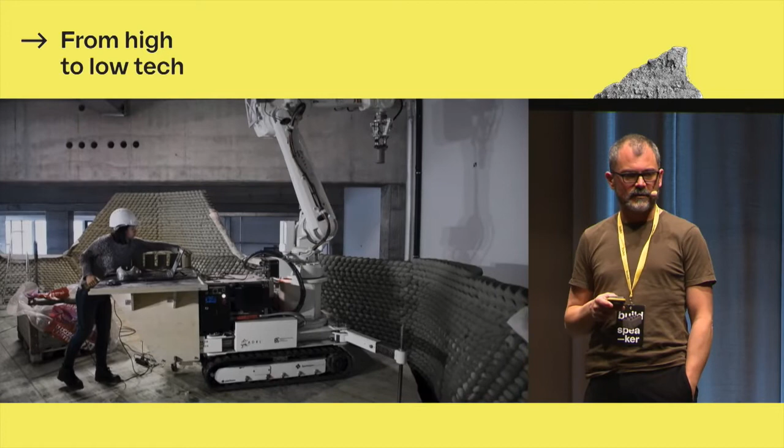That part is placed in space in a custom way, and the ability of this brick to deform is a gigantic advantage for the whole system, because a thing that can deform cannot have a collision. And in automation, it's often the small collisions—one millimeter—that make your life really hard.

Yeah, okay, I think this was the lecture. I don't know, we don't have time—I guess we ran out of time, right? Yeah. Or we do it. Is there a panel at the very end? No. Okay, so then, questions please.